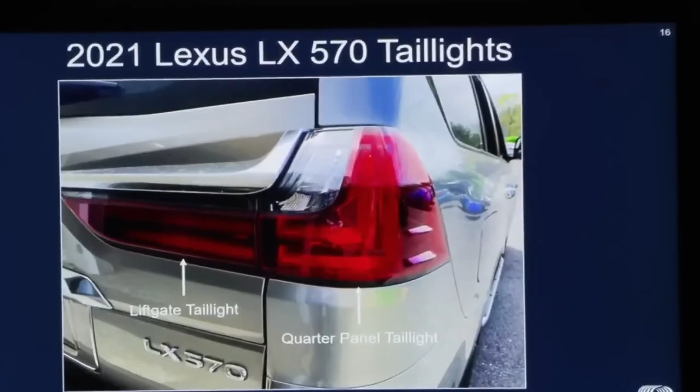So it's the same year, make, and model of the subject vehicle. So it's a 2021 Lexus LX 570. So it's the same weight, same geometry, same as the subject vehicle.

Is this a picture off the internet, or do you actually have access to this truck? We have access to that vehicle, yes.

And ultimately, what testing did you undertake specifically as it relates to this particular vehicle? We did full-scale vehicle testing with the vehicle driving into an ATD arm, as well as an ATD arm attached to a dummy, and then a full-on impact to a test dummy.

Did you assess the damage to the right tail light after these various tests? Yes, after all of the tests. Did you assess the acceleration and quantify the forces that were involved? Yes. Did you assess the material and textile damage to the clothed ATD? Yes. Did you conduct lab tests in an effort to answer some of these questions as well? Yes.

And you've already mentioned this, but you utilized in your testing the exemplar vehicle to the fullest extent that you felt necessary? Absolutely, yes. Were you hampered or hindered in any way in terms of damaging the vehicle or utilizing the vehicle in any way that you wished? No.

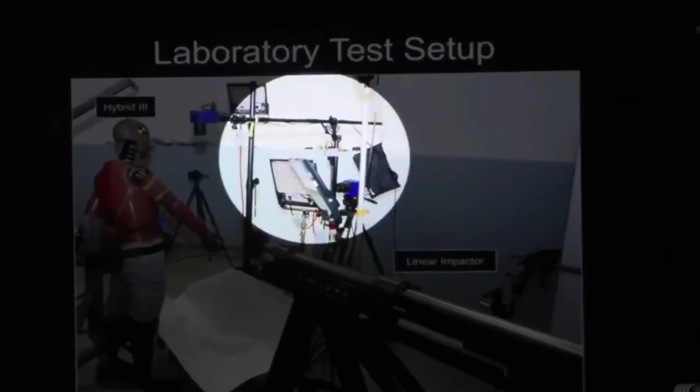What are some of the instrumentation that you use in addition to the mechanical impactor, to track the data? So at the top here there's a blue camera, and there's another blue camera. These are our high-speed cameras, and you'll see there's a bunch of lights around them because the frame rate's so high, and it's only sampling a very short amount of time, so you have to have a lot of light when you do these high-speed tests. We have the high-speed cameras running, and we have an accelerometer mounted to the ATD arm here on the other side. There are also a couple other cameras documenting this overall.

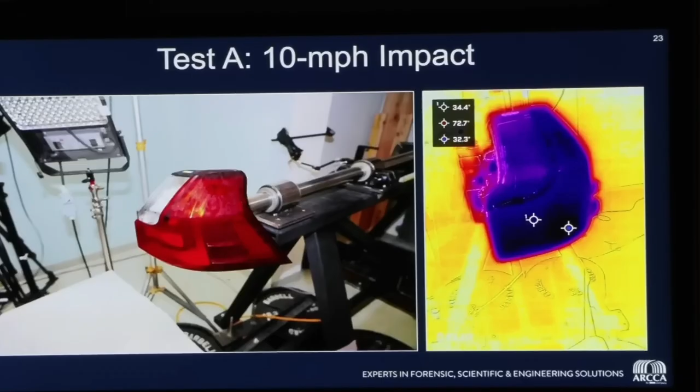How did you get that exemplar taillight down to around freezing? So all of the taillights that we tested were preconditioned overnight in a freezer. Why was that important? It's my understanding that at the time this allegedly occurred, the ambient temperature was 31 degrees Fahrenheit. As I mentioned earlier, there's a correlation between how plastics perform in cold weather, so we wanted to take that variable into account in our testing to precondition them to temperatures consistent with the time of the alleged incident.

What are we looking at in this photograph? So this is a video. Do you want me to go ahead and play the video? Tell us what we're about to see, and then I'll ask the court's permission.

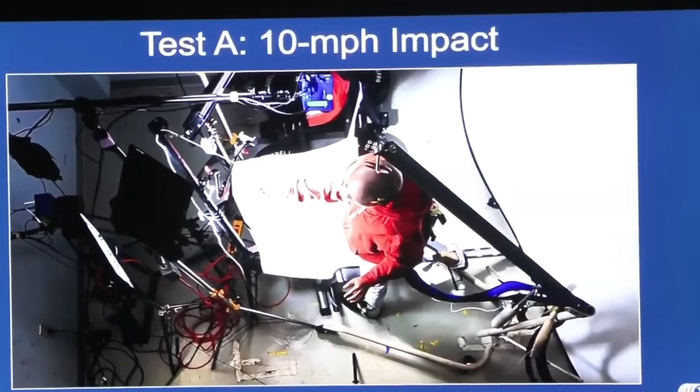So you're looking at a camera mounted above the entire setup. If you look at the top portion of this video, you will see the taillight, part of it covered by the high-speed camera. What will happen is the linear impactor will fire, and the taillight will be accelerated up to 10 miles per hour, striking the clothed ATD arm. With the court's permission, let's go ahead and play the video.

Next slide, please. What is this? So this is also a video, but with the high-speed camera, looking top-down at the arm. You will see the taillight enter from the left and contact the arm. I'll note this is essentially slow motion, so it's not happening in real time. You'll see the taillight slowly moving, but it's actually moving at 10 miles per hour. Understood, go ahead and play that.

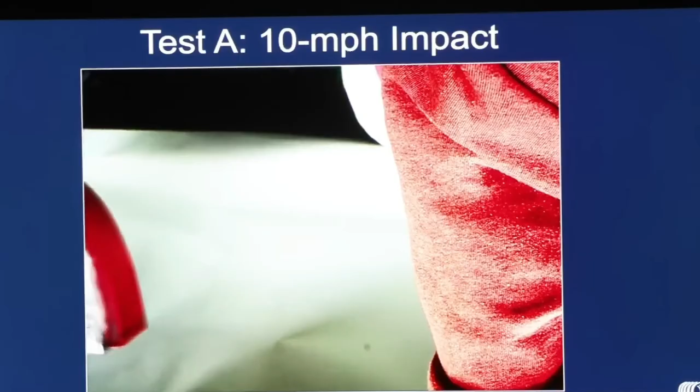Can I ask a question now that that's played? How did you mount the taillight to the linear impactor? We had to get a little creative there, as you may have observed when we had the physical assembly out earlier. The back of that isn't some nice clean surface we can just bolt on, so we had to 3D print a bracket that we could bolt onto the linear impactor, and we used polyurethane expanding foam to marry those two together so that we could bolt it onto the linear impactor for this test.

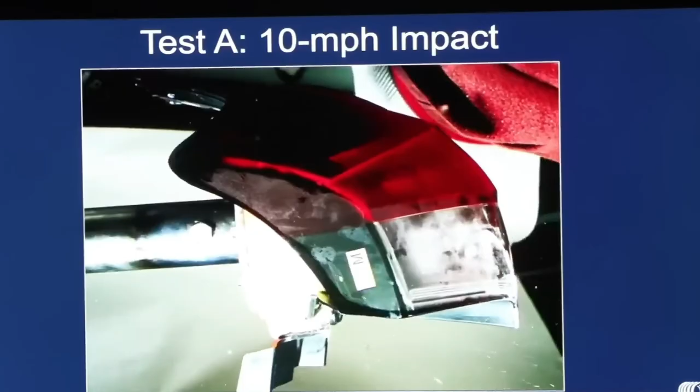Did you see any debris from that foam mounting mechanism? Yes, there's a few flakes of that polyurethane foam off the backside being dispersed there. With regard to this particular 10-mile-an-hour test, what did you note in terms of damage to the taillight? It was very minimal. And what did you note in terms of any damage at all to the hoodie? There was none.

Can we go to the next slide, please? What are we looking at in this slide? So this is looking at a side view, same test, just from the side. Similarly, you'll see the taillight come from the left and impact the arm. If we could play this, please.

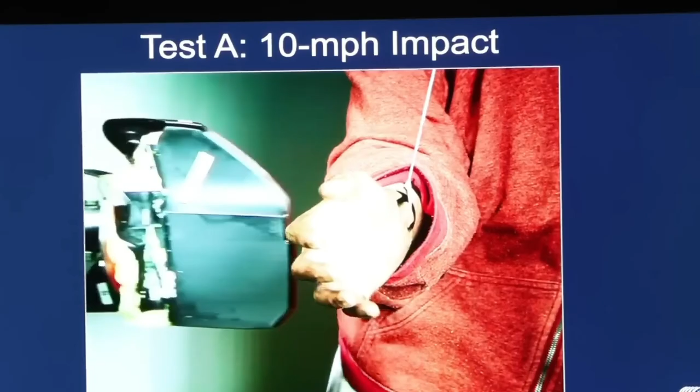What did you note in terms of deflection of the test arm? Well, the arm reaches a common velocity with the taillight based upon the portion of the arm that was contacted, consistent with how Dr. Welcher has it oriented. It will become accelerated up to 10 miles an hour roughly, over about 10 milliseconds.

How long does an eye blink take on average? Off the top of my head, I don't know. Probably pretty quick, somewhere around 250 milliseconds. Does that sound right? Sustained.

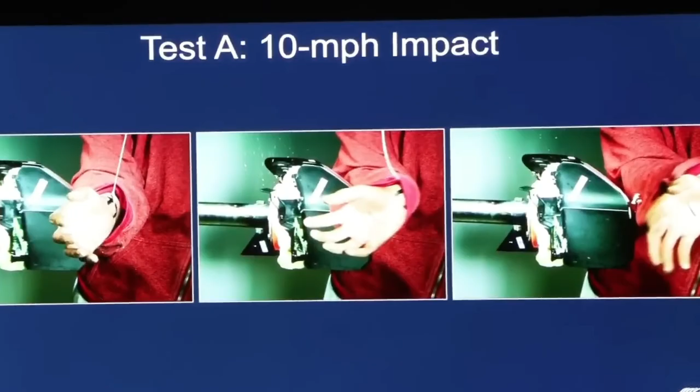What are we looking at in this series of photographs? These are extracted frames from the high-speed video we just saw, basically showing just at contact, just after contact, and then post-contact, so you can see the kinematics of the arm and how it's moving.

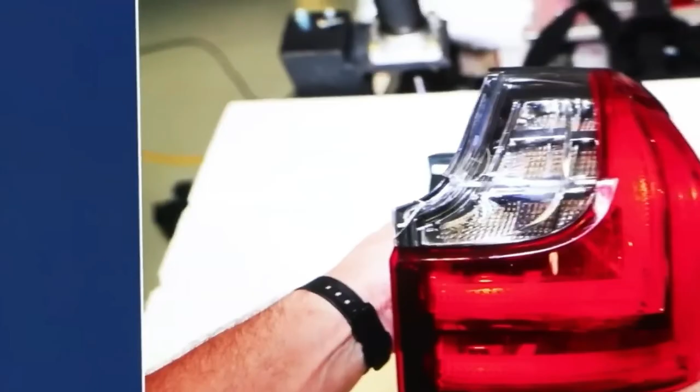What is this photograph? These are photographs taken of the taillight after the 10-mile-an-hour test. I will note there were a couple small fragments of the clear portion of the assembly, the outer lens, missing from the turn signal area towards the left, and some small fracturing in that area.

How would you describe the damage to the taillight of the 10-mile-an-hour test? If I may go to the next slide—sure. So this was the totality of that damage at 10 miles per hour. I would describe it as minimal and superficial.

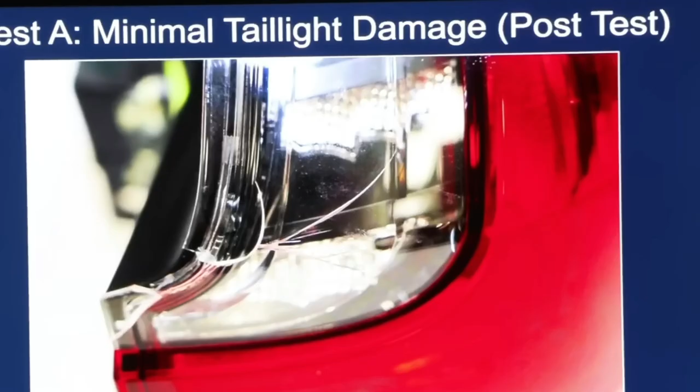This is still test A, is that correct? Correct. Were you able to reach any opinions as to whether the damage to Mr. O'Keefe's clothing is consistent with being struck by the taillight at 10 miles per hour? What I observed from the test is that there was no mechanism to create any of the holes we observed on the subject sweatshirt. Do you hold that opinion to a reasonable degree of scientific certainty? Yes. As well as the former opinion? Yes.

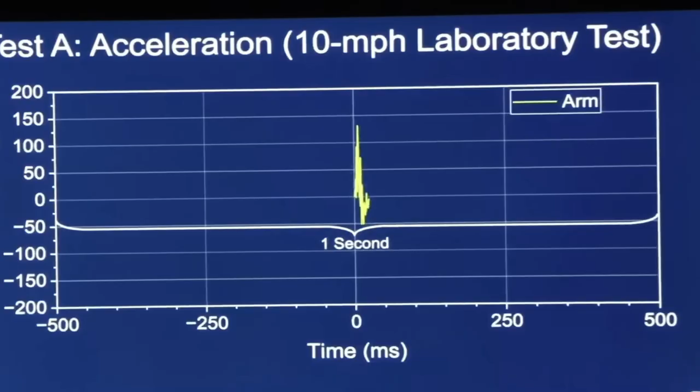What are we looking at in this graph? We're looking at the acceleration, or the change in speed over time, that parameter we discussed earlier. As the arm is impacted, we have the accelerometer mounted on the inside portion of the forearm. You see it starts to accelerate because it's changing speed, and then it levels off after the impact has subsided and reached a common velocity.

What do we see in terms of the G-forces the arm is subject to? The peak is occurring right around here, at about just over 6 milliseconds, and the peak acceleration is just over 130 Gs. What does that mean, what is a G? A G is acceleration due to gravity. If we're being held down by 1 G, you could think of it as a multiplication factor—this is 131 times the acceleration due to gravity.

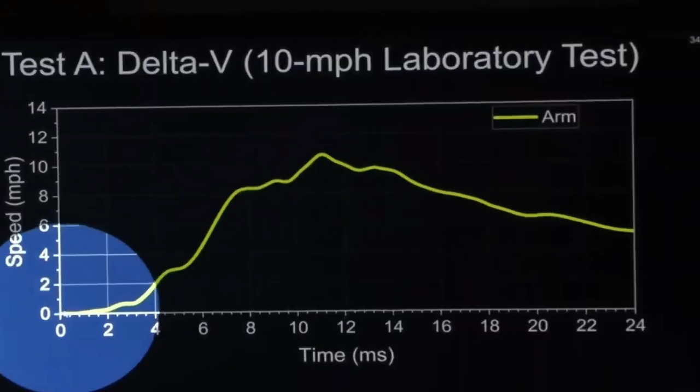If we do some math to the previous data that we collected, it's a technique called integration, where we can actually add up all of that acceleration to determine what speed the arm got up to. And when we do that calculation to this data, what we see is that initially at the impact, the arm's at rest, right, Newton's first law. And then we impart a force on it in terms of the taillight impacting it. It's going to cause the arm to accelerate and change its speed. So as I noted earlier, it's essentially going to reach a common velocity with the taillight based upon how Dr. Welcher has the arm oriented.

And we can see that it's a tick over 10 miles per hour at just over 10 milliseconds. So that means that the arm in a 10 millisecond period is going from 0 up to about 10 miles per hour, which was the speed of the impact.

And 131 times the force of gravity is exerted on the arm at the same time? Where does gravity play into this? What is the 131 Gs? Where's that force exerted? That is the acceleration that the arm experienced as a result of that impact, so that's how quickly it was changing in speed.

Understood. Let's go to the next slide.

Dr. Wolfe, before we get into laboratory test B, I failed to ask you, were you compensated or was ARCCA paid following the proceeding last year for any of the time? Yes, last year. Correct. Do you know how much that was? From what I recall, I think it was around $20,000. Was ARCCA paid by the defense for your initial testing, the initial analysis which we talked about earlier this morning? No, not the report, testing, none of that.

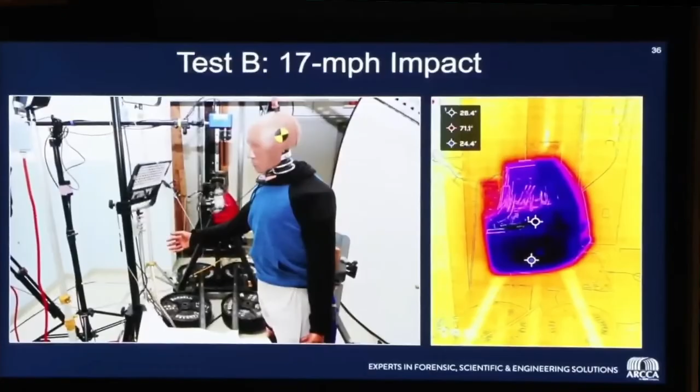Just so I'm clear, Doctor, I want to make sure I'm on the same slide as you. Is this slide 35 pursuant to your notes? This is slide 36. 36, got it. Okay. We could be a little bit more brief, I think, because is this similar to the 10-mile-an-hour test, just with increased velocity? Correct.

What about the purple-hued taillight on the right? What is that? So again, that is a thermal image depicting the temperature profile of the right taillight that was tested. I was just going to note that the average temperature profile of the taillight here in this test was approximately 30 degrees Fahrenheit. Is that below freezing? It is, yes.

And the ATD, the test dummy, if you will, is it also clothed? Correct, yes. You may notice a difference in the sweatshirt color. We put on a new sweatshirt in this test. Was it also an exact replica of the sweatshirt at issue worn by John O'Keefe? I'll ask it a different way. How did it compare to the sweatshirt that was worn by John O'Keefe? It was made by the same company and had the same material blend as the previous test and the one that Mr. John O'Keefe was wearing. Next slide, please.

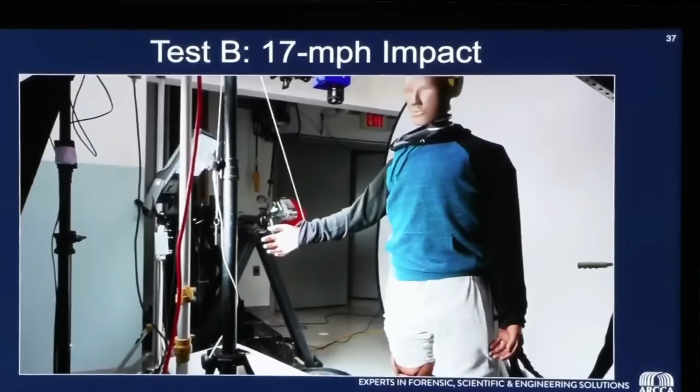What are we looking at here? This will be a video where the taillight is accelerated up to 17 miles an hour and impacts the arm. One of the things you'll see is actually an artifact of the test, where the taillight, due to the fact that the impactor stops at the end of the stroke, that force causes it to decouple from the polyurethane foam we use to adhere the two.

What do you mean by decouple? Once the linear impactor reaches the end of its stroke, it stops instantaneously, and the force of that stop causes where we adhered the two together to detach, basically break away. In essence, it doesn't matter because we only care about that short duration of time, that 10 milliseconds. So once it breaks, it's already reached a common velocity to the taillight.

Okay, can we go ahead and go to the next slide, please?

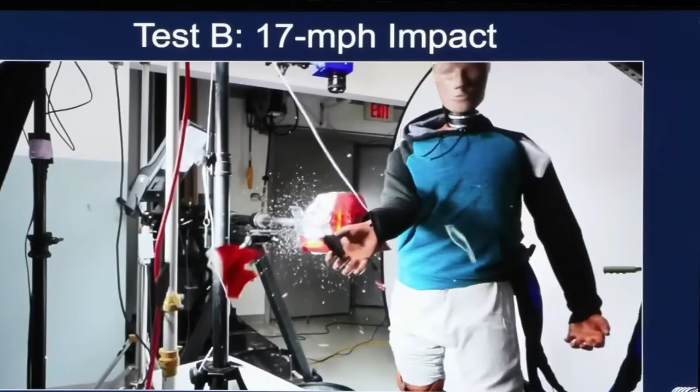What do you note about this impact? One of the things you'll see is kind of a dust cloud. That's all the particulates from the expanding foam we use, kind of going over the arm and the taillight there. Do you note more damage or less damage to the taillight at 17 miles an hour versus the 10 mile an hour test? There is more damage, yes.

Let's go to the next slide, please. What are we looking at here? You're looking at a top-down view from the high-speed camera. You'll see the taillight enter from the left, impacting the arm at about 17 miles per hour. Okay, go ahead and play it.

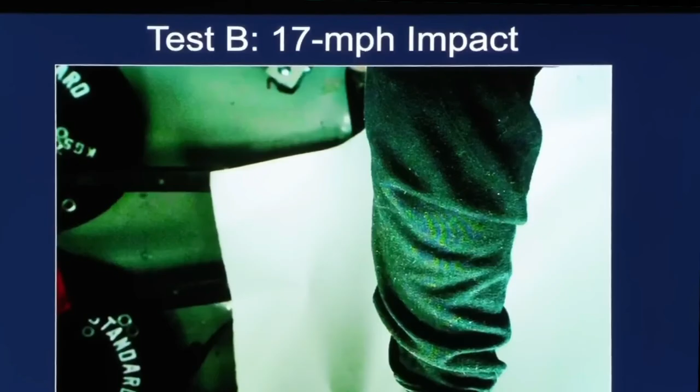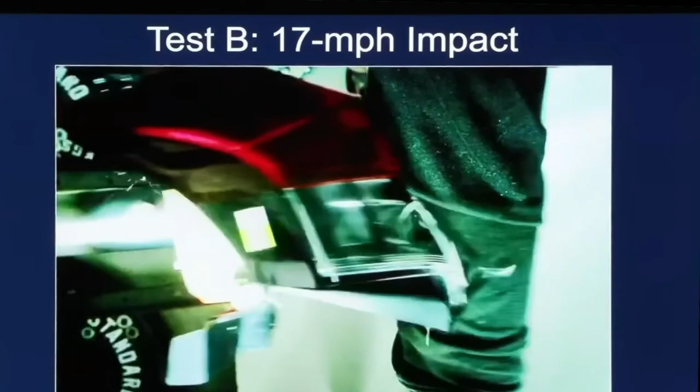Can you describe the decoupling that's shown here? Absolutely. As you can see, where the two are basically married together, it's kind of actually coming back together now. That bond that we had was the most effective way that we could mount it to the impactor. It just became detached due to the force of that impactor stopping at the end of the stroke. Understood.

Next slide, please. What are we looking at here? In this slide you're looking at another high-speed video, just a side view. Again, you're going to see the taillight enter the frame from the left, impacting the arm at 17 miles per hour. Is this in slow motion as well? This is in slow motion, correct, not real time.

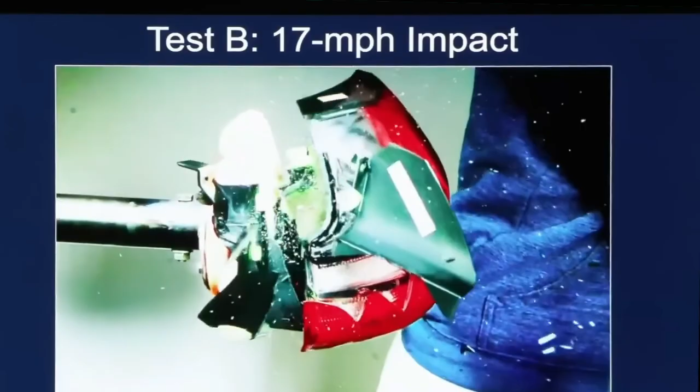What do you note in terms of the deflection on the arm? The arm, as we saw in the previous one, is accelerated up, so it's moving out at roughly a common velocity with the impact speed. And what did you note about the damage to the taillight? It was more significant than the 10 mile an hour test, which had very minimal damage, where several fragments of the red outer lens fractured as well as the clear lens. Okay, next slide.

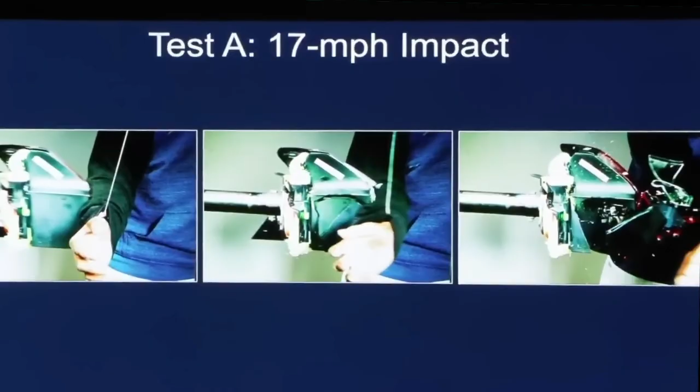And what is this depicting? This is extracted frames from the previous video, just showing right at contact, during contact, and post-contact. Next slide, please.

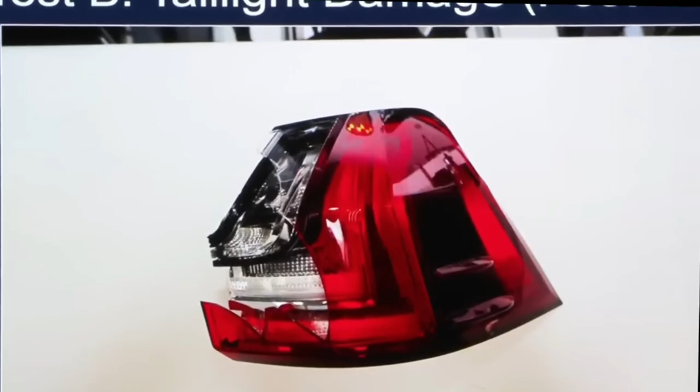Next slide, please. What is that a picture of? Another photograph showing the taillight post-test. Again, no damage to the underlying diffusers in terms of being cracked, shattered, or broken. And what did you note in terms of the damage to the outer acrylic, the red piece? It broke into a few fragments, and I think on the next slide I depict those in a photograph.

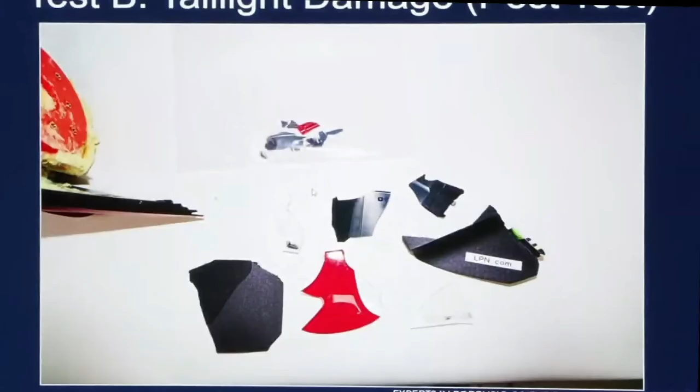I'll point out one other thing you can see in the photograph: this is the 3D printed bracket we used to bolt it onto the linear impactor, with the foam on the other side that mounted it to the taillight.

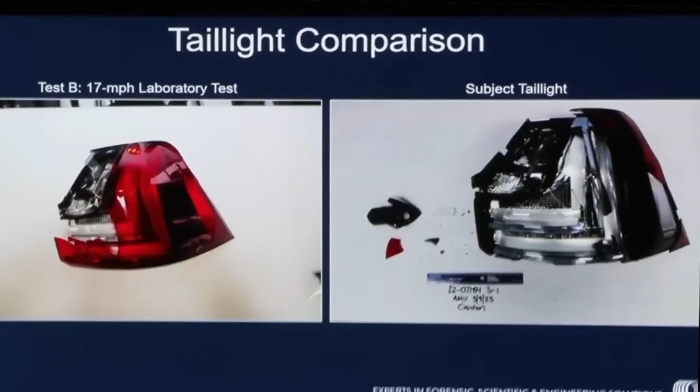What is this a picture of? This is a side-by-side comparison showing a depiction of the 17-mile-an-hour test impact to the test taillight, comparing it to that of the subject taillight. Were you able to reach any conclusions as to whether the damage to the subject taillight is consistent with striking an arm at 17 miles per hour? It's inconsistent from a damage perspective.

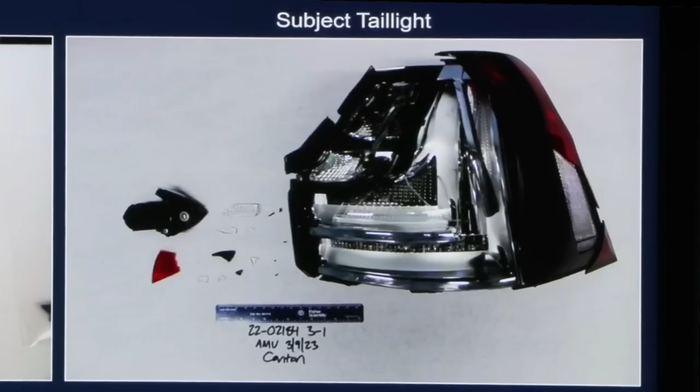What's the basis of that opinion? The test that I've just shown you. Was that testing conducted in accordance with the scientific literature and generally accepted methodologies you've described? Yes. Is the damage to the right rear taillight consistent with striking John O'Keefe's arm at 17 miles per hour? No. Do you hold that opinion to a reasonable degree of scientific certainty? Yes.

Based on this testing, is the damage to the shirt John O'Keefe was wearing consistent or inconsistent with the shirt on the ATD? It was inconsistent compared to the sweatshirt Mr. O'Keefe was wearing. Based on that, do you have an opinion as to whether the damage on Mr. O'Keefe's clothing is consistent with being struck by the right rear taillight at 17 miles per hour? It is inconsistent.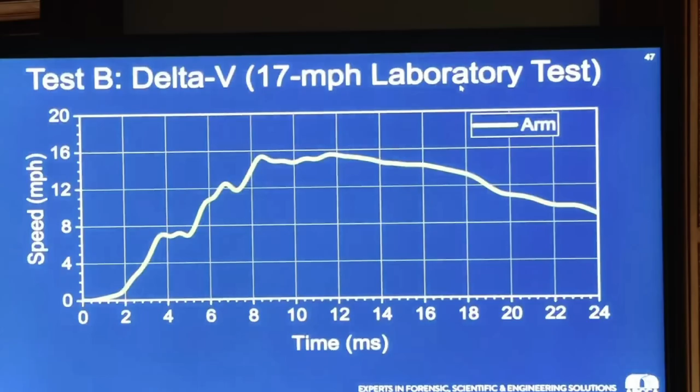Did you conduct additional tests other than the two lab tests we've talked about? Yes. Describe in general the tests you undertook after the lab tests. We conducted two tests with a suspended ATD arm that was impacted by an exemplar 2021 Lexus LX570. We then conducted a test where the arm was attached to a test dummy, and our final test was a full-on impact to a test dummy.

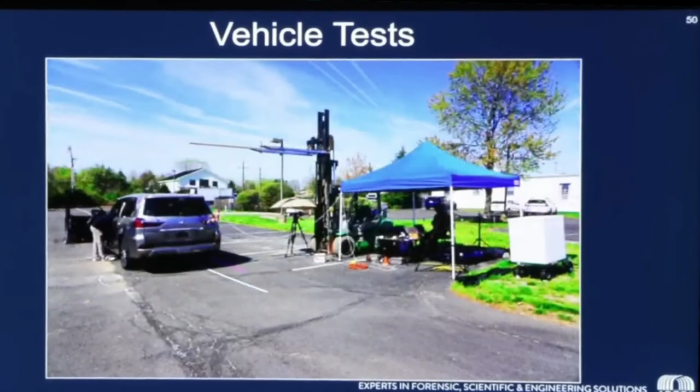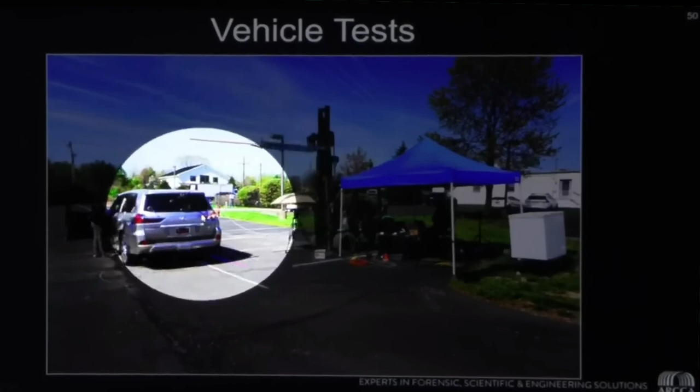What's depicted in this photograph? There's a number of things here. We talked about the Lexus, the exemplar vehicle. We have a forklift that was hoisted up, ultimately suspending the arm—I have an additional photograph showing it close up. The arm was suspended from the forklift at the correct height to interact with the taillight. We have our high-speed cameras set up under this umbrella, and another one over here. You'll also note we brought out the chest freezer when installing these in the Lexus to keep them at that steady state temperature for as long as possible.

It was based upon my review of Dr. Welcher's work, and through his static and dynamic test or paint test, this is how the arm was roughly oriented when the alleged contact occurred.

What were you trying to replicate in positioning the arm this direction, this way, as it relates to the SUV? Well, I think as I stated earlier, it was to understand, okay, let's get beyond just simple geometry, aligning things. What happens to the arm? What are the accelerations? What's the damage?

We want to answer some of those other questions that Dr. Welcher didn't answer. Does this configuration align with your understanding of Dr. Welcher's alignment of the arm as it relates to the vehicle?

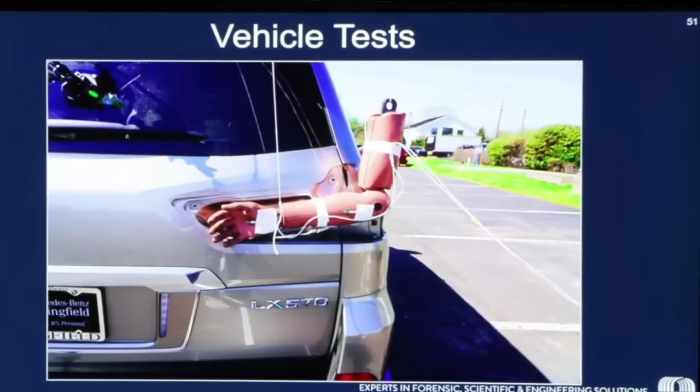This may be self-explanatory. What was the speed of your first test out in the field? 15 miles per hour. Next slide, please.

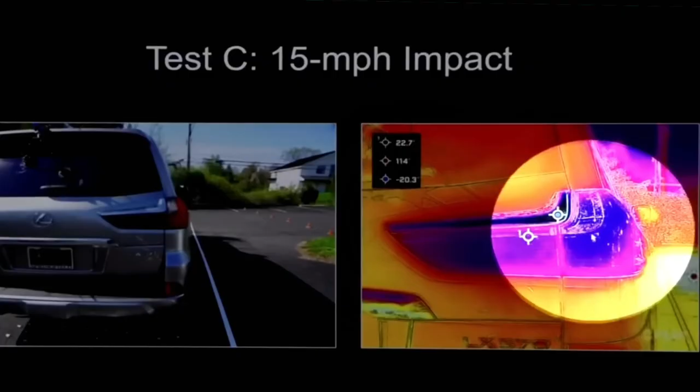Was it important in this testing to account for the temperature variance of the taillight assembly? Yes, absolutely, and we certainly strive to maintain that. One of the things you may see in this photograph on the left are these pellets on the ground, due to the fact that during the installation process, one of my colleagues was positioned adjacent to the taillight fixtures, applying a compress of dry ice to help mitigate any heat transfer during the install process.

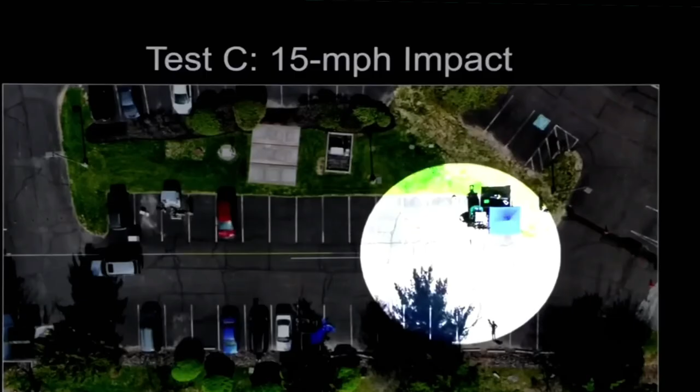Can you use your spotlight and orient us? Where are the vehicles and the testing locations? Yes. So the Lexus is starting here. You will see it accelerate in reverse with the hybrid arm suspended in this area here. Is this a video or just a still shot? This is a drone video. Let's go ahead and play that.

Did you see the impact area? It's quick. Right. What did you mean when you said more of a side swipe or a clip? I think the next couple of videos will help demonstrate that. Let's move on to the next one.

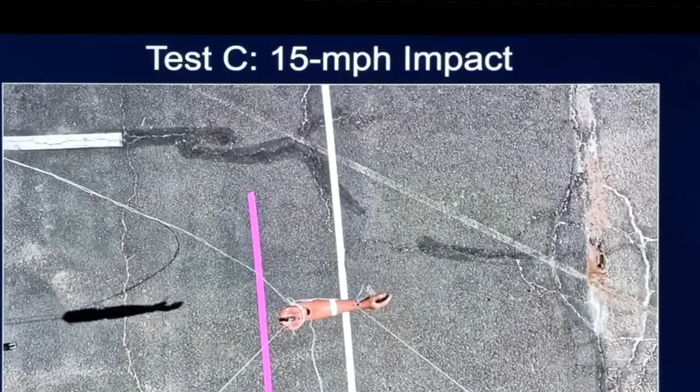What are we looking at in this video? I'm sorry, in this photograph. So this is going to be a high speed or a slow-mo video. You're going to see the Lexus come in from the right and then move across the screen to the left, and you'll see contact occur between the taillight and the arm. Okay.

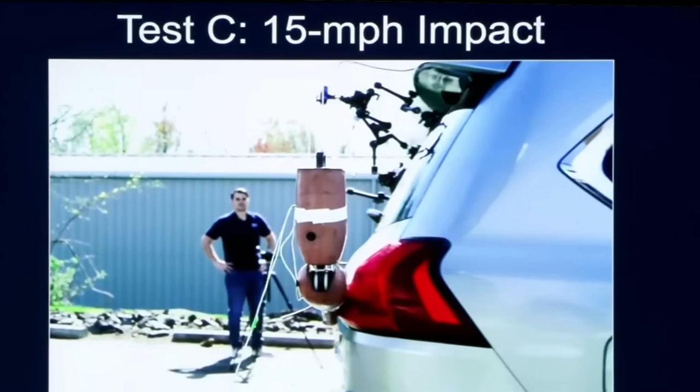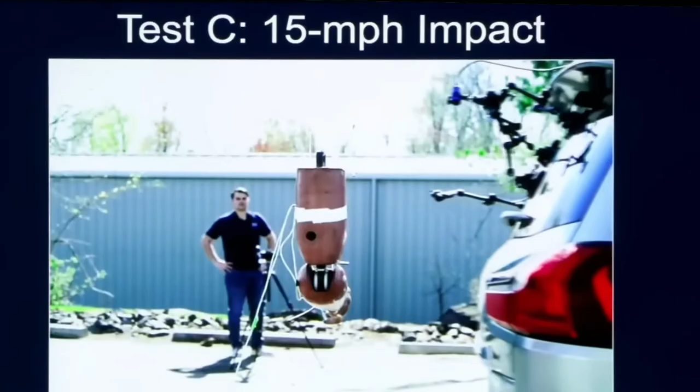Can you explain for the jurors what you meant by more of a side swipe or a click? The hand and wrist are in the area of the quarter panel taillight, with a portion of the forearm in contact as well. The wrist and hand are in contact with the lift gate portion of the taillight, and the forearm is more in contact with the quarter panel taillight.

What is this angle? This is the same test, just a different angle with the high-speed cameras in slow motion. And this is at 15 miles per hour, correct? 15 miles an hour, correct.

Can you explain, given the fact that this is suspended, does that have any impact on the ultimate analysis or reconstruction, rather than being attached to an ATD? Effectively, mass is mass. Whether the arm is suspended or attached, the arm is on a joint, so it can accelerate freely of the rest of the body. If anything, even if it's attached to the body, there may actually be some additional force associated with that, just because there could be more mass attached to it.

Understood. Okay, let's go ahead and play this video.

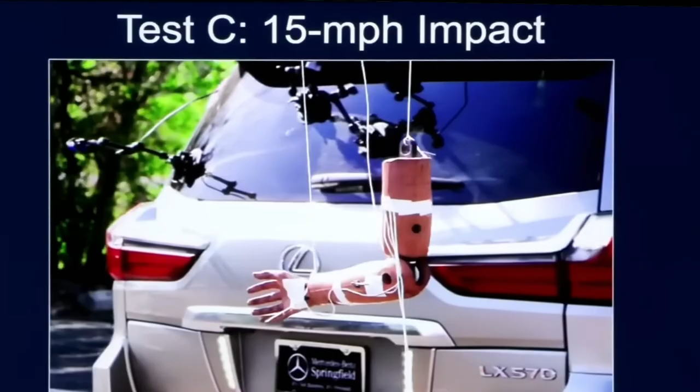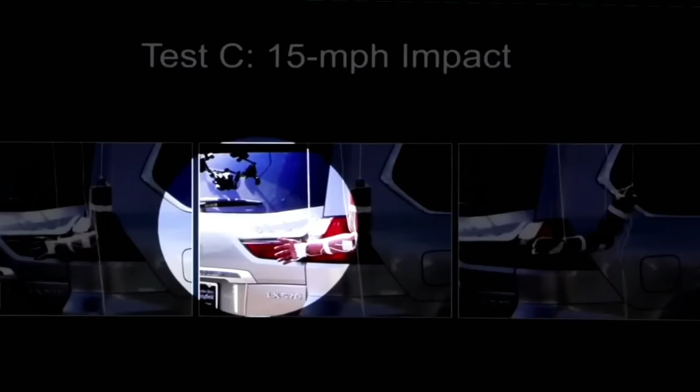Can we go to the next slide, please? What are we looking at in these three photographs? Starting from left to right: just at contact, just after contact, and then post-contact. At contact, the hand isn't positioned as far out as in the previous test; the hand is in the area of the lift gate taillight and wrist, with part of the forearm in contact with the quarter panel taillight. As you saw in the video, the arm just moves out of the way of the vehicle as it comes by.

Understood. Next slide, please. What are we looking at here? This is a photograph of the test vehicle subsequent to the test, depicting the lack of damage to the taillights. Describe what you did see in terms of damage or lack of damage on the taillight. There was no damage or fracturing to the taillights.

Describe the orientation of the arm in this particular test that you said was more of a side swipe. What was the orientation of the arm to the taillight in terms of how much of the arm touched it? Qualitatively speaking, it appears to be the hand and the wrist and the lower portion of the forearm, maybe to the mid forearm or so. So nothing on the upper arm? Correct. Making contact? Correct, nothing on the upper arm, yes.

Okay, if we can move past this slide and onto the next slide. What is this depicting? This is depicting the test taillights of the 15 mile per hour impact into the hybrid arm compared to that of the subject taillight. Was there any notable damage at all on the exemplar taillight following test C at 15 miles an hour? The only thing there may have been was some very slight abrasions maybe to the plastic, but there certainly was no breaking or fracturing of the lens assembly.

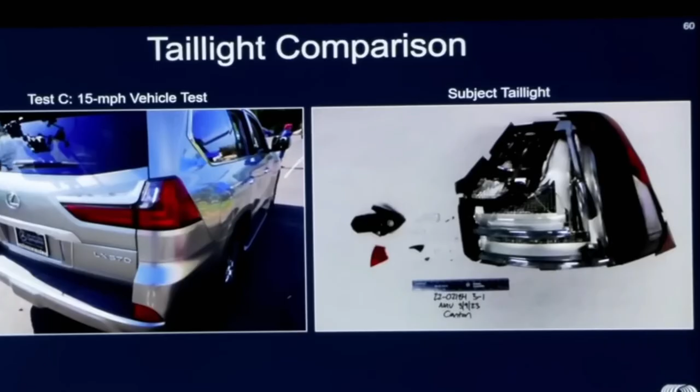Were you able to reach any opinions or conclusions as to whether the damage to the subject taillight is consistent with striking an arm at 15 miles per hour? In this test, it was inconsistent. Even in a side swipe? Correct. Was that testing done in accordance with scientific literature and generally accepted methodologies in accident reconstruction? Yes. Is the damage to the right rear taillight of the subject vehicle consistent with striking John O'Keefe's arm at 15 miles per hour in a side swipe configuration? It's inconsistent. Do you hold that opinion to a reasonable degree of scientific certainty? Yes.

Can we move to the next slide, please? What are we looking at in this graph? You're looking at the hand acceleration over time. As you saw in the previous video and slides, the hand initially made contact with the taillight, so it gets accelerated up first. We're getting peak accelerations in this test for the hand of about 254 Gs, over a period of a little over 4 milliseconds or so.

What was the arm or appendage outfitted with to determine the data on this graph? If you think back to the lab testing, that's why we did the testing incrementally. In the lab test, we didn't have a way to mount the liftgate assembly to evaluate that interaction. So when we moved to full-scale vehicle testing, we had a liftgate taillight and the full vehicle, and we instrumented the hand with an accelerometer as well as the forearm, so we were able to measure the acceleration of both in these tests.

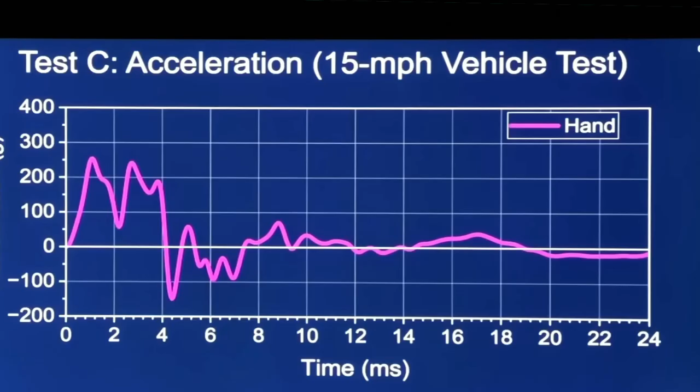Is that reflected in the fact that the arm pivoted? Yes, there's some rotation going on, so it's not translating or accelerating.

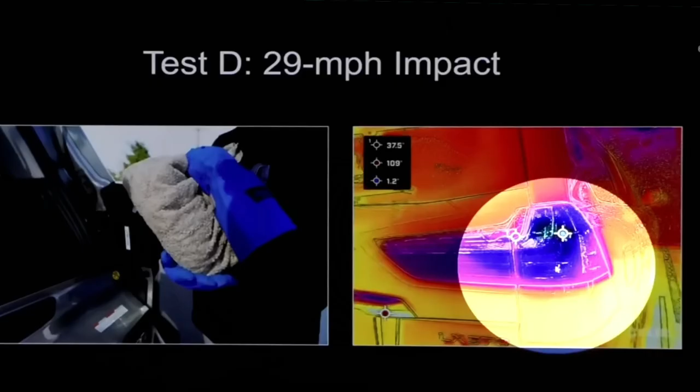Okay, if we could watch this video, please.

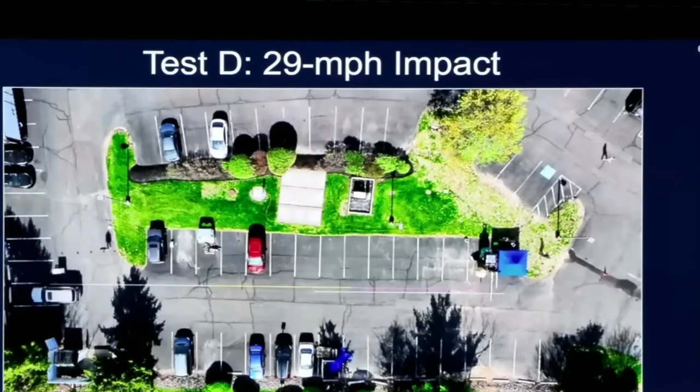Do your next slides show, there you go, the suspended arm. What are we looking at here? This is a video camera positioned on top of the forklift, looking down at the arm. You'll see the vehicle move from bottom to top as this video plays.

What are the purple and white lines that we see? Those are guidelines to help. I will note that this is like a needle in a haystack - it's very hard to hit this small of a target. So they just served as a guideline to reference as we're accelerating rearward into this.

Is this in real time? This is in real time, yes. What's the speed that the vehicle is entering the frame at? 29 miles per hour, thank you.

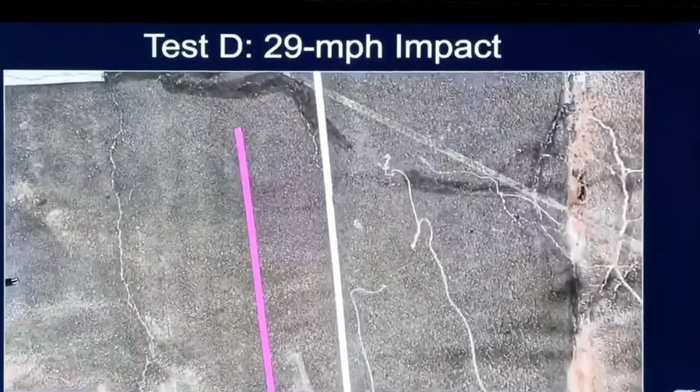What happened to the arm in terms of its suspension? It actually gets ripped off from the mounting location. Is there a reason you believe physically that the arm was ripped off from the suspension tethers? Well, certainly there was enough force to break the tie lines to the forklift. Was there a test value of those tie lines? I think they were rated at 150 pounds. What does that suggest in terms of the force exerted on the arm to tear off the tie lines? It indicates that the arm saw at least 150 pounds of force.

Okay, next slide please. What are we looking at in this video? This is going to be a slow motion video - you'll see the Lexus accelerate in reverse, making contact with the arm. And again, this is the 29 mile per hour impact test. Okay.

Next slide, please. What is this? This is a high-speed video, slow motion, of test D at 29 miles per hour into the ATD arm that is suspended. You'll see the Lexus enter the frame from the right and impact the arm.

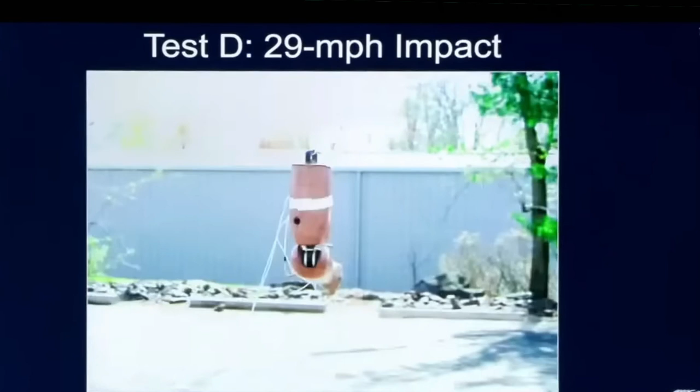Was this strike more reflective of what you were attempting to replicate? Yes, this was a more central impact to the arm. Thank you.

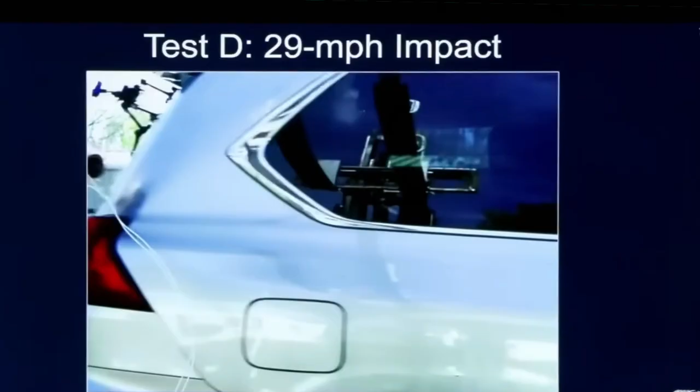Next slide, please. What is this? So this is a high-speed, slow-motion video depicting test D at 29 miles per hour, just a different perspective than the previous video.

Next slide. What are we looking at here? So this is extracted frames from the high-speed video. Starting left to right, this is roughly at first contact, with the majority of the hand and forearm in contact with the liftgate taillight, and a portion of the elbow in contact with the quarter panel taillight. Can I stop you right there on that far left frame? Does that fairly replicate what you were attempting to approximate in terms of the orientation of the arm versus the taillight?

Yes, more of a central impact compared to that first test at 15. Is that more or less consistent with what you saw in Dr. Welcher's test where he had his arm in that still shot associated with the geometry of the car? Is this consistent with what you were trying to replicate after your review of Dr. Welcher's report? Yes. What were you trying to replicate, or why were you trying to replicate this at the 29 mile an hour test in this particular orientation?

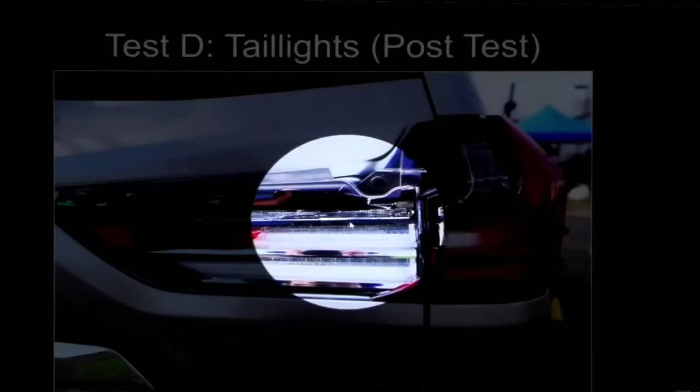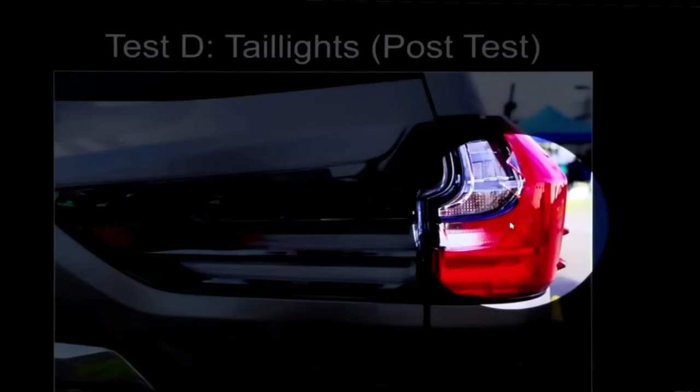What are we looking at? So this is a photograph depicting the damage to the liftgate taillight as well as the quarter panel taillight. And what do you note in terms of that damage? On the liftgate taillight, a significant portion of that thick 5 millimeter red outer lens is fractured and broken off. The underlying diffusers are still in place. There was a small crack in, I believe, the upper diffuser. The quarter panel taillight had the clear section damaged with the outer lens missing, along with some fragments from the outer portion of the red part of the lens. Next slide, please.

What are we looking at in this slide? So this is another photograph depicting the quarter panel taillight. As I indicated, there are portions of the red lens cover missing. The interior diffusers remained largely intact in this test. Next slide.

What is this side-by-side depicting? This is showing the results of the 29 mile per hour impact test to the test vehicle compared to that of the subject taillight. Given that orientation of test D, were you able to reach any opinions or conclusions as to whether or not the damage to the subject taillight is consistent with striking an arm at 29 miles per hour? It was inconsistent. What's the basis for that opinion, Dr. Wolfe? The results of this test.

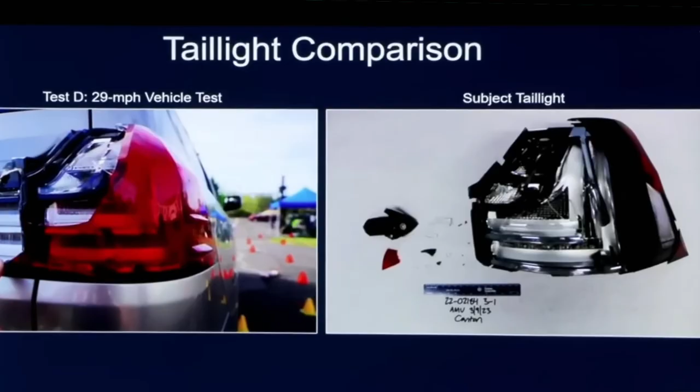Was that testing conducted in accordance with the scientific literature and generally accepted methodologies in the field of accident reconstruction? Yes. Is the damage to the right rear taillight consistent with striking John O'Keefe's arm at 29 miles per hour? When I say the right rear taillight, I mean of the subject vehicle.

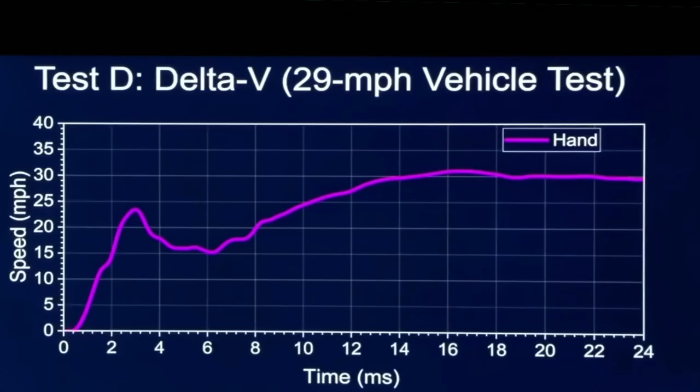Next slide, please. What are we looking at in this graph? So this is looking at the change in speed. What speed did the hand get up to as a result of the impact? We can see that in about 3 milliseconds, the arm is moving nearly at almost 25 miles per hour. Then a little bit later, still very quick in time, at about 14 milliseconds, it's at about 30 miles per hour.

Next slide, please. Test E, 24 mile an hour impact test. What is that? This is a 24 mile an hour impact test to the ATD arm attached to a test dummy. Next slide, please.

Why did you utilize 24 miles an hour for this test? It's my understanding that this is the upper end. There is a triggering event of, I believe it's 1162.2, and at the end of that data, the speed is approximately 24 miles per hour. So we did a test at the end point, if you will, in that data set.

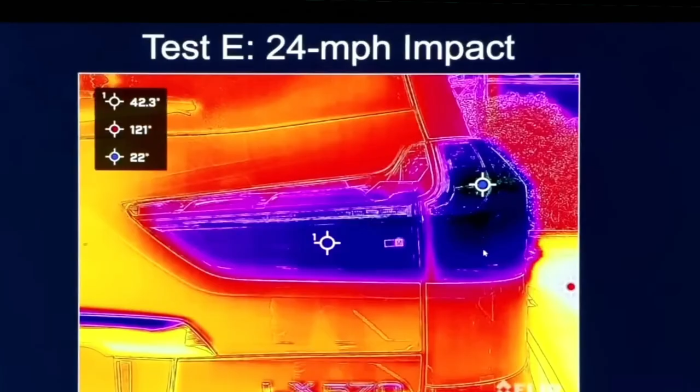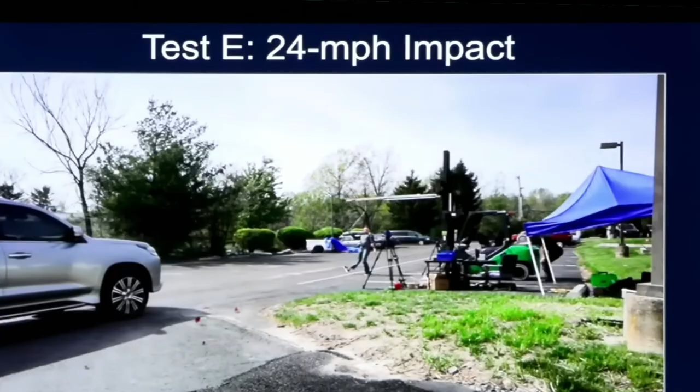And could we go to the next slide, please? And what is this? This is a perspective from the high-speed camera, so a slow motion video with the Lexus reversing into the ATD arm at 24 miles per hour.

Before you play this, Dr. Wolfe, I failed to ask this, it may be obvious. After each of the tests, C, D, E, F, were you replacing the taillight with new exemplar taillights that had temperature accounted for? Yes, every test had a new set of quarter panel taillights, as well as liftgate taillights. And even in the test at 15 miles an hour where the taillight was not damaged, we still put on new taillights. We did not repurpose or reuse any of the taillights. Okay, thank you. If you could play this for us, please.

Was the ATD outfitted with the hoodie in this configuration? Yes. Before this test, did you confirm whether the right sleeve was damaged or undamaged? Before the test, it was undamaged.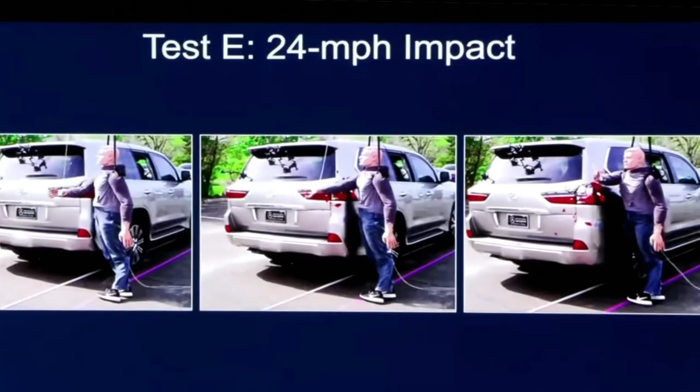This is an overall photograph depicting the taillights subsequent to this test at 24 miles per hour. There's no damage to the liftgate taillight, but there is damage to the quarter panel taillight.

Is there any damage to the internal diffusers on this taillight? If I go to the next photograph, you can see there's a thicker line, but it's actually not a crack. I'm looking at the clear diffuser with the dots you see - this line that appears opaque is part of the assembly, just how the plastic is molded. There's a very small crack in the underlying diffuser, but all the remaining portions are intact.

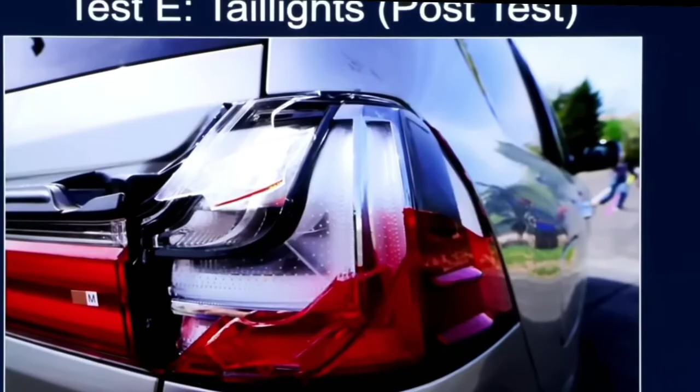What about the chrome piece running between the diffusers? I don't believe that was damaged during this test. What about the clear acrylic toward the top left of that taillight housing? It was partially fractured, but not the entire outer portion of it.

This is a photograph depicting the quarter panel taillight subsequent to the 24-mile-an-hour impact test with the ATD arm, compared to the subject taillight. Were you able to reach any opinions as to whether the damage to the subject taillight is consistent with striking an arm at 24 miles per hour? Based upon the test results, it's inconsistent with striking an arm.

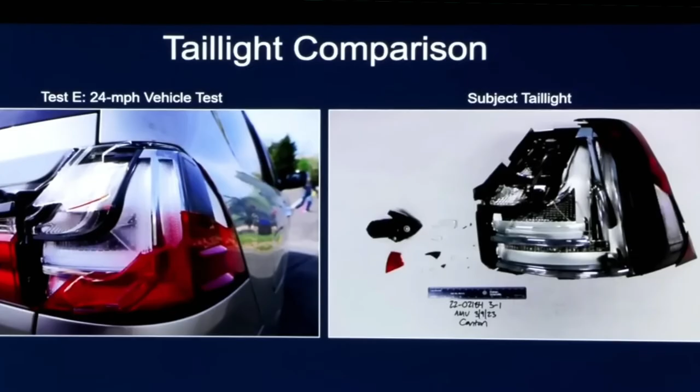I base that opinion on the test results shown in the video and data acquisition. During this test, we had the instrumented hybrid arm outstretched from the test dummy with accelerometers on the hand and forearm, and data acquisition monitoring vehicle speed. We accelerated the vehicle into the arm at 24 miles an hour to conduct a dynamic impact test, collecting data on the acceleration the arm experienced and observations about damage to the taillight. I hold that opinion to a reasonable degree of scientific certainty, and the tests were conducted in accordance with generally accepted methodologies in accident reconstruction.

These photographs depict the test clothing. Prior to the test, there were no holes or damage to the sweatshirt, and that was the same post-test - we made no observations of fraying, holes, or punctures to the material of the sleeve. There was no damage whatsoever observed on the right sleeve of the ATD.

This graph shows the acceleration of the hand reaching a peak acceleration just after 10 milliseconds of approximately 435 Gs.

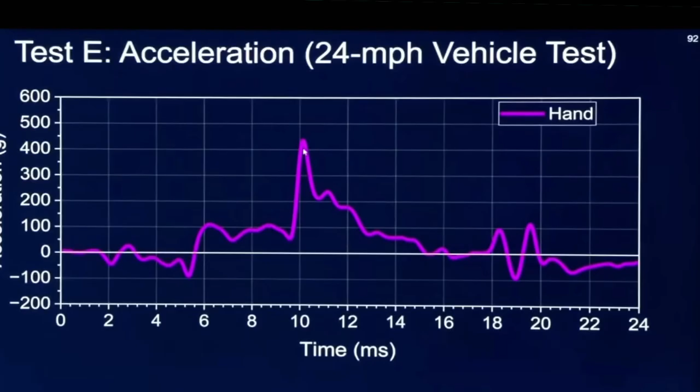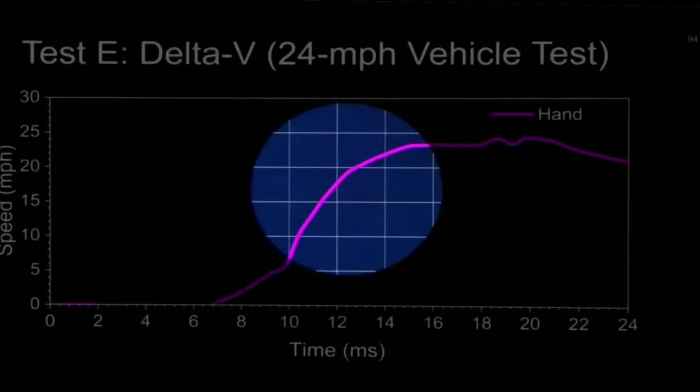This delta V graph shows the change in speed of the hand as a result of the impact, ultimately getting up to approximately 24 miles an hour, matching the impact velocity of the Lexus, in about 10 milliseconds or less.

What is the 29 mile an hour impact test in test F? This was a test we conducted with what's known as a rescue Randy, or a test dummy, that was a full-on impact to the right rear corner of the Lexus. Let's take a look at the next slide, please.

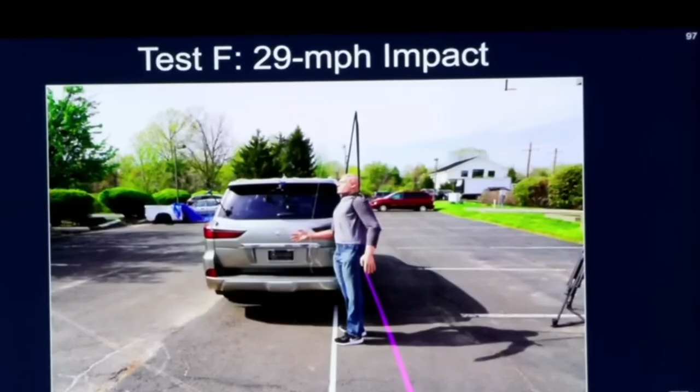With regard to test E, I want to go back to that test. Was that reflective of a direct impact on the arm itself? Correct, right in the area of the elbow to the quarter panel taillight. As opposed to a side swipe on the arm? Correct, yes. Thank you.

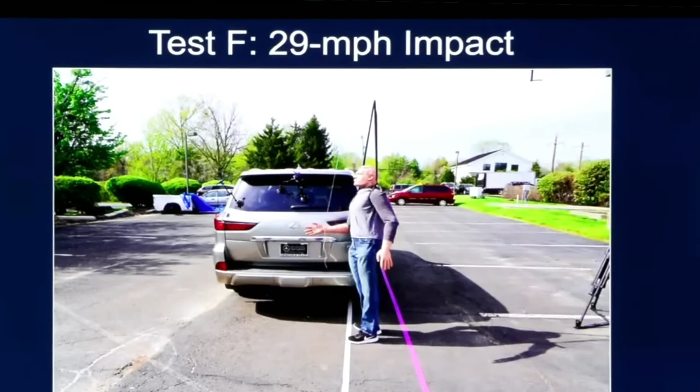Did you undertake to test a direct impact on the body of the ATD, the rescue Randy dummy, in this test? Yes. What are we looking at here? This is the intended impact configuration with the rescue Randy suspended by the forklift, in the path of the Lexus at that right rear corner. How much does this test dummy weigh? Approximately 200 pounds. Next slide, please.

What are we looking at in this photograph? This is a video. We had a little bit of a false start, so our high speeds weren't triggered, but we were able to pull our surveillance video to get at least an overall video of the test taking place. Did you intend to have high-speed video just like in every other test? Yes. What went wrong? Just a miscommunication between the driver and the rest of the test engineers. Got it, so a false start.

Was the taillight housing reassembled for this test? Yes, it had a preconditioned new set of taillights on it. Other than the taillight damage we've seen repeated through testing C through F, was there any other inherent damage to the lift gate that existed when the exemplar vehicle was received by you? When it was received, no, it was in good condition. No defects or damage were noted.

What are we going to expect to see in this video? In this surveillance video, the Lexus will come from the right to left, strike the rescue Randy, and then you'll see the rescue Randy projected and slide on the ground. Can you play that one more time, please?

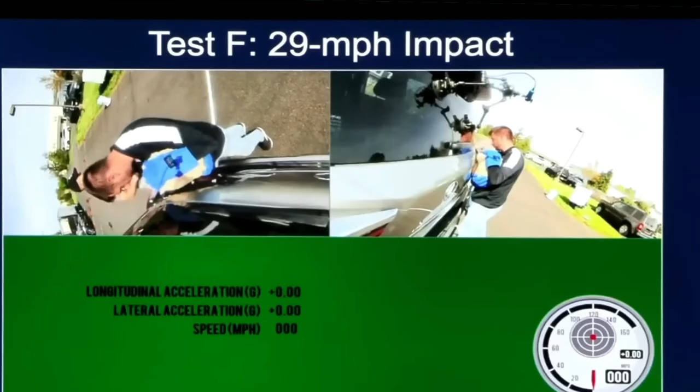That was my question - the blue, that's dry ice, and gloves? You don't want to touch dry ice with your bare hands, so yeah, he's wearing gloves. He's capturing the thermal images now.

And what are we looking at in this? So these are extracted frames from that video you just saw from the data acquisition system. On the left here is just before contact between the test dummy and the Lexus. On the right is just at contact.

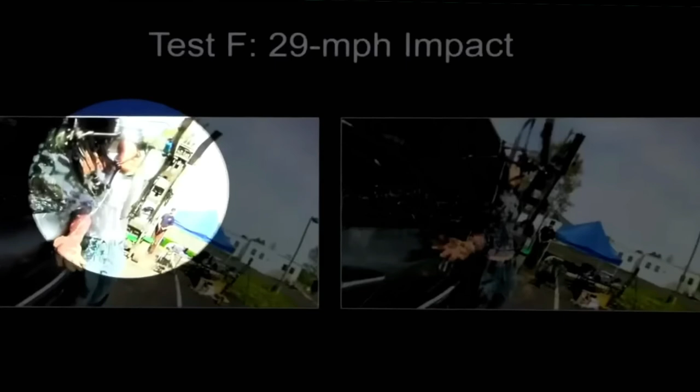Next slide, please. And what are we seeing in these series of photos? This is obviously during the collision sequence. The body now has loaded into the lift gate and the back window. What you're seeing here is the back window shattering. And this is just a few split seconds later in time where, again, the body is continuing to move with the vehicle as it's contacted.

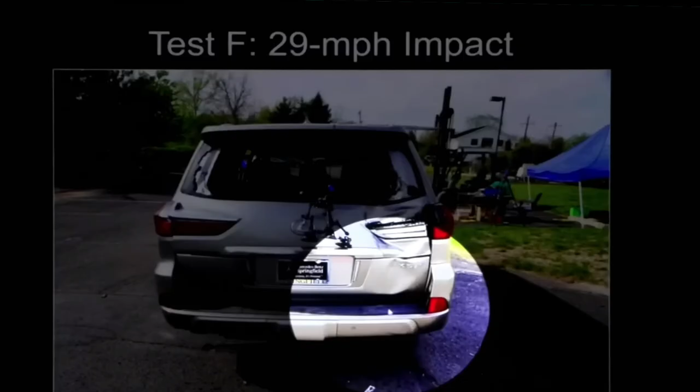Next slide. And what is this? This depicts the post-impact damage to the rear of the Lexus. As I noted, the rear window is completely shattered. There's deformation and crush to the liftgate section of the vehicle. The bumper step was popped out, and then there was some minor fracturing in the bumper cover at the lower level.

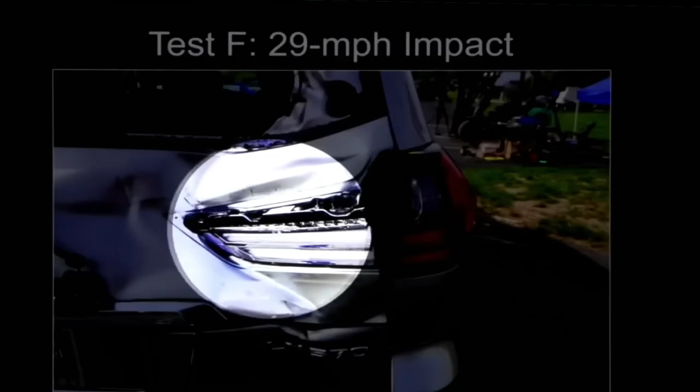Did you note anything regarding the internal components of the exemplar taillight, even at this direct impact? So the taillight, as you can see, it blew out the outer lens cover. I believe the part of the clear diffusers were actually still in place. I think the lower one might have been fractured here, but I think the upper one was still in place.

At 29 miles an hour with a direct impact, did the exemplar taillight exhibit the same type of damage to the diffuser as the subject taillight? I'm not sure I understand your question. More or less damage in this photo to the diffuser specifically than in the subject taillight? Well, I think there was more in the subject taillight. As I mentioned, I believe the top diffuser was intact. Okay, that was my question.

And is there another slide at the back end of this one? That's it. Okay, we can have the lights.

Dr. Wolfe, you conducted tests at what miles per hour? Tell me the sequence. It would be 10 miles per hour, 17 miles per hour, 15 miles per hour, 29 miles per hour, 24 miles per hour, and then a full-on hit at 29 miles per hour.

Regarding all of the tests you conducted, what did you observe with regard to the damage, if any, to the internal components of the quarter panel taillight? And I'm talking about the chrome pieces and the diffusers. It was less in all of the tested taillights than that of the subject taillight.